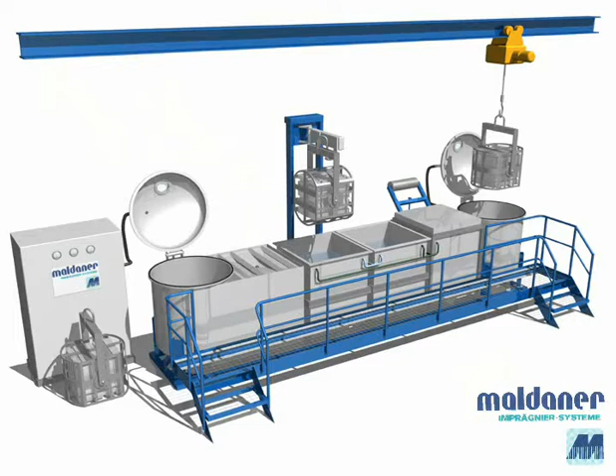Hubert MALDANER Limited have been offering job shop impregnation with synthetic resin since 1962. Building plants and distributing synthetic resins, they have developed the technology continuously. This film demonstrates the steps of the MALDANER impregnating process, making a rejected casting workable for the application intended.

The sectional view of a component shows what happens inside the porosity as well as inside the boreholes.

There are three types of porosity. Through porosity, going right through the casting, is illustrated in a red colour. Blind porosity, if not impregnated, can lead to internal corrosion and spotting out if plated, coloured red too. In closed porosity, this is not a problem unless uncovered by machining operations. This is not coloured because it has no entry and cannot be filled with resin.

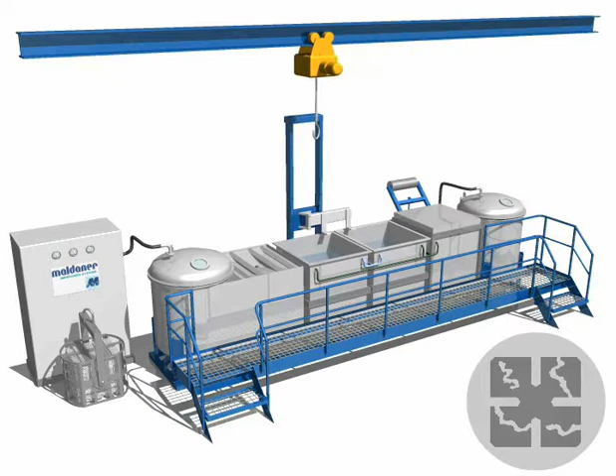The charging basket, charged with dry, oil-free components, having regard to their shape and grade of mechanical treatment, is deposited in the impregnating tank.

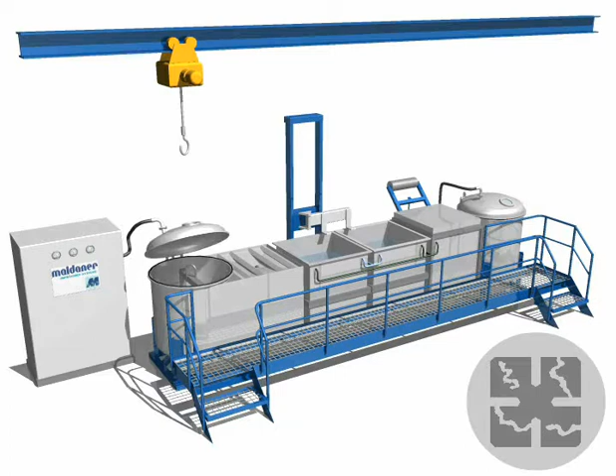By applying a vacuum of under 10 millibar inside the autoclave, the air trapped in the open porosities is withdrawn.

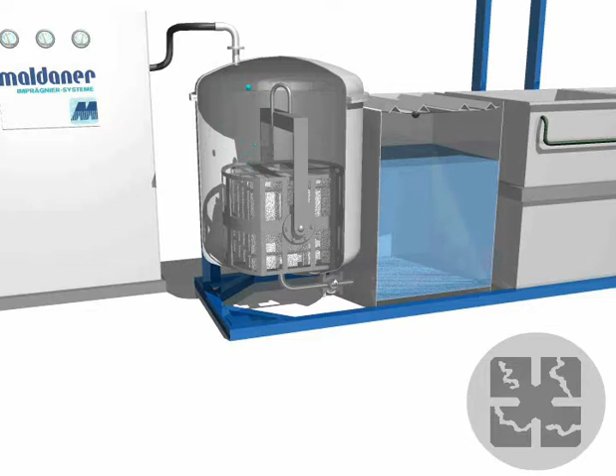After the dry vacuum cycle, the flood valve opens and the resin flows into the autoclave until the components are covered completely. The vacuum pump keeps on working in order to maintain the high vacuum.

As no atmospheric pressure is hindering, open porosities get filled with resin when it flows into the autoclave and covers the components. Moreover, by capillary force, the resin is drawn into the pores.

After the wet vacuum cycle, the atmospheric pressure inside the autoclave is restored. Owing to the difference in pressure between the vacuum inside the porosity and the atmospheric pressure inside the autoclave, the open porosity gets filled completely.

After the pressureless phase, resin is drawn back by vacuum into the storage tank.

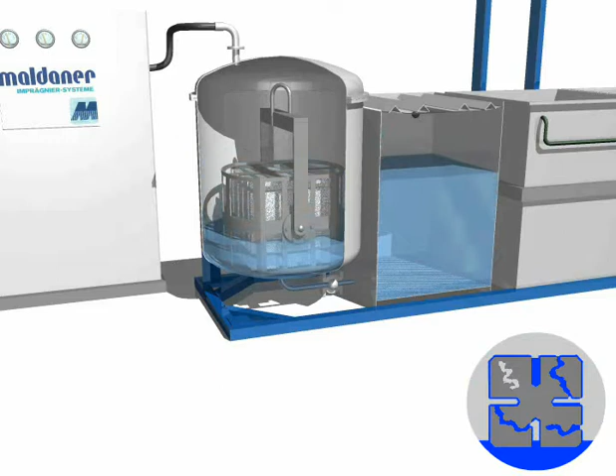The charging basket is lifted out and then conveyed to the drain station. By turning the basket, components get drained.

A centrifuge helps to economize consumption of resin up to 30%. If complicated castings have to be impregnated, resin drained off flows back into the storage tank.

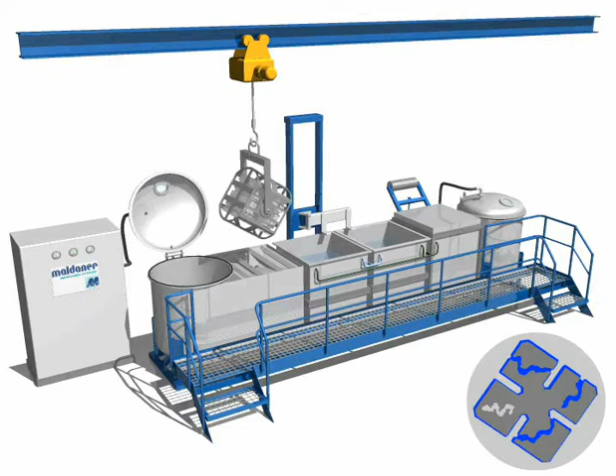As the resin emulsifies in water, it can be washed off with water easily.

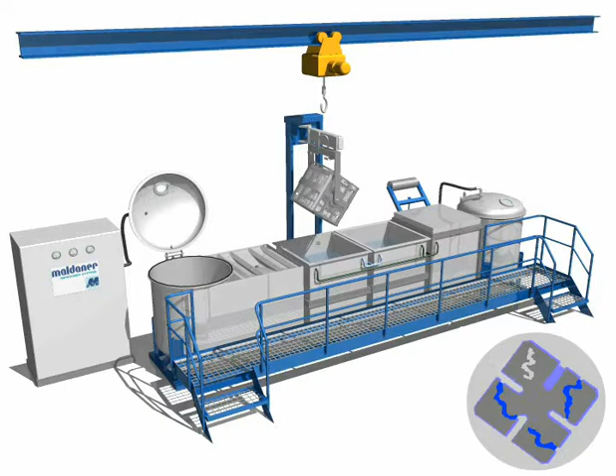Blind holes are rinsed only if water flows in when the basket is immersed and flows out when the basket is lifted. Therefore, the basket has to be turned round 90 degrees after some lifts. Vertical blind holes now turn into a horizontal position and resin can be rinsed off.

Due to the capillary force, the resin adheres in fine and medium porosities.

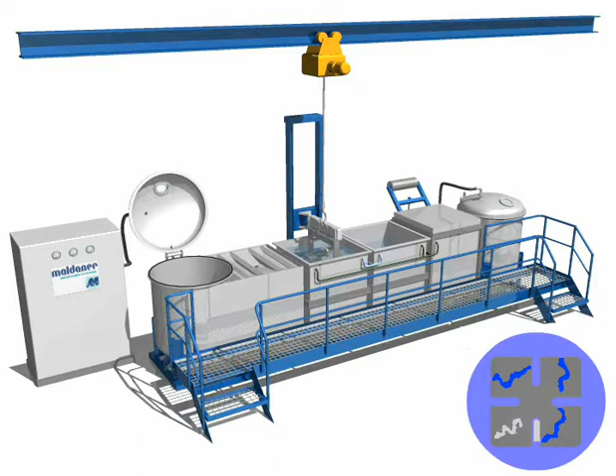By turning the basket above the wash tank, adhering wash water drains off to the tank. In order to obtain a clean surface, the remaining wash water has to be rinsed off. The basket has to be immersed into the clear water in the rinsing tank from a minimum of 2 sides.

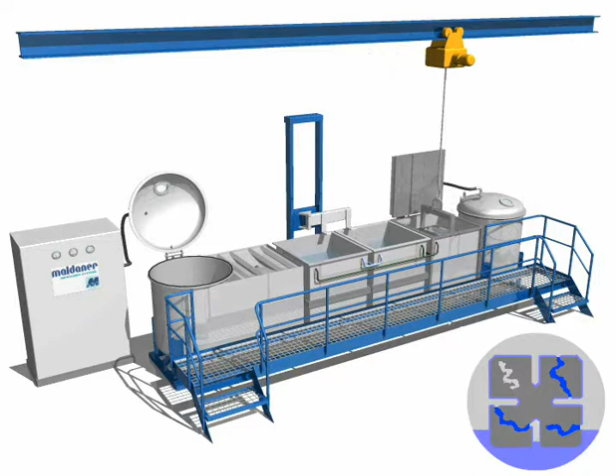For curing the resin inside the porosities, the basket with components is deposited in the hot water curing tank. It remains there at 90 degrees centigrade for 10 minutes.

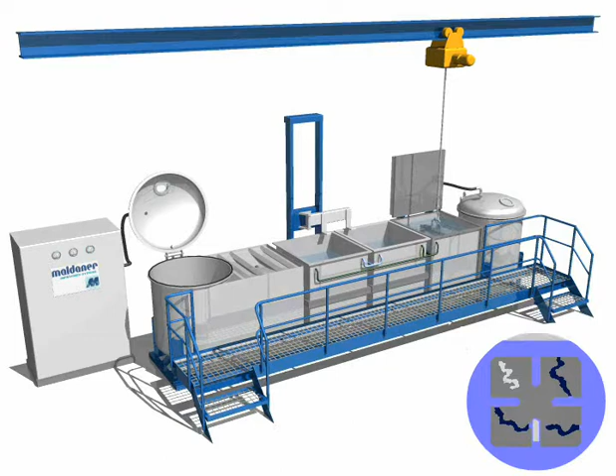During polymerization, the resin turns into a solid homogeneous material, taking the porosity shape and adhering irremovably in the porosity. After polymerization, components are finished and can be leak tested or be assembled directly.

Components with blind holes should be dried by vacuum. This is to prevent corrosion caused by moisture.

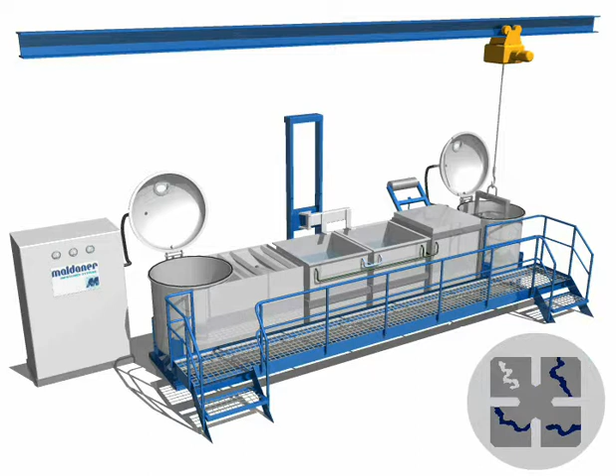The cycle through the impregnating process is finished. It makes no difference whether you run your own impregnating unit or use the services of our job shops.